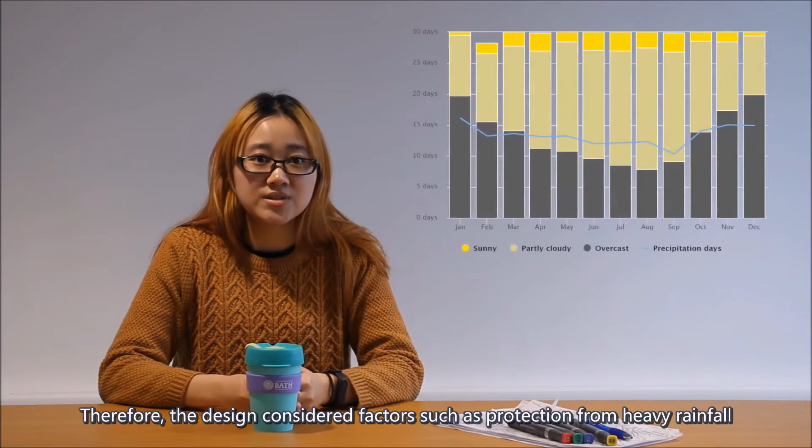The Creative College is in suburban Bristol, in the southwest of the UK, which has a temperate oceanic climate. It is warm during summer and cool and rainy during winter. Therefore, the design considered factors such as protection from heavy rainfall, as well as finding ways to provide the best daylight. The design began with the site analysis.

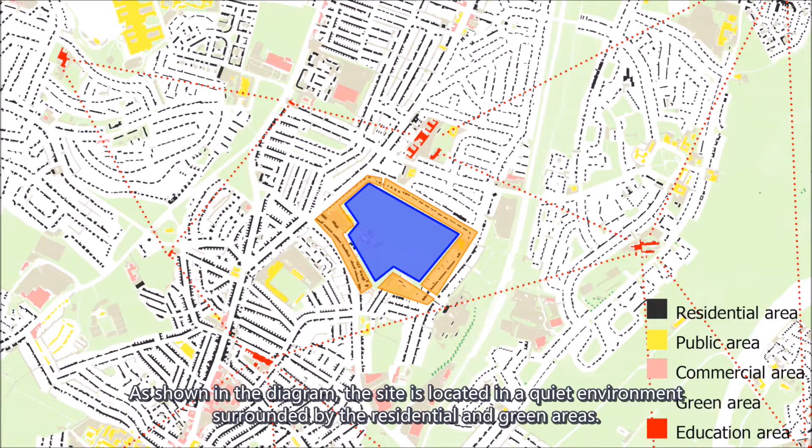As shown in the diagram, the site is located in a quiet environment, surrounded by residential and green areas. The site is mainly affected by the southwest wind. We decided to use windows at various levels to improve indoor air ventilation.

The topography of the site decreases from northwest to southeast. We designed large stairs to allow the students to sit and rest.

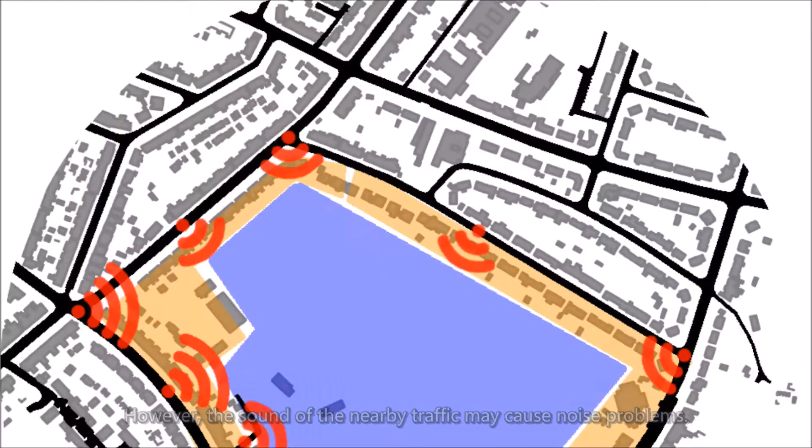The traffic is most convenient on the south side of the site, which leads to the city center. The location is suitable for including school gates and introducing bus stops. However, the sound of nearby traffic may cause noise problems. Therefore, the college was placed at the north part of the site. There are numerous trees on the site which were repositioned around the grounds to prevent noise and air pollution.

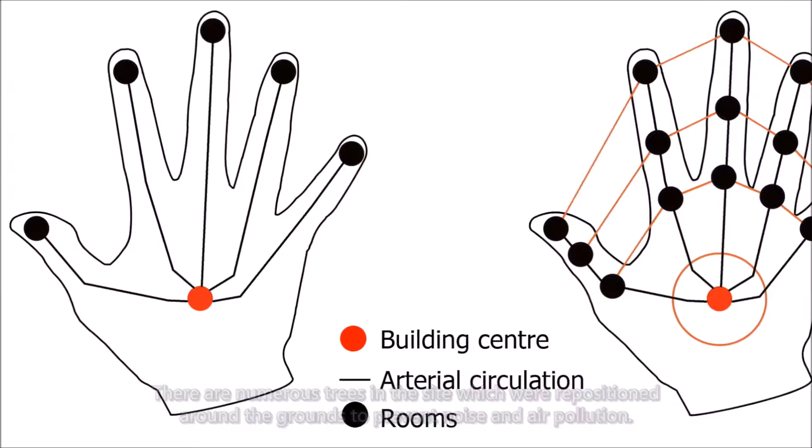The concept was based on the shape of a hand. The public rooms of the college were grouped together as a palm, and classrooms scattered like fingers. The college consists of a primary school, a secondary school, and a shared school.

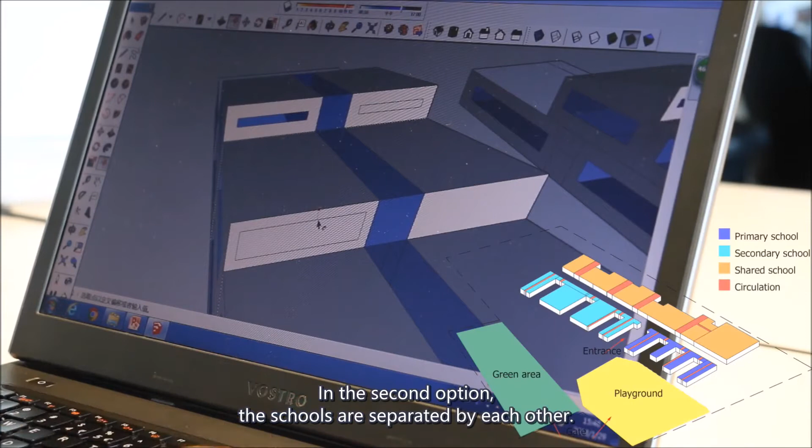There were three options. In the first option, these three schools are concentrated and connected by a long corridor. In the second option, the schools are separated from each other. In the third option, schools are dispersed but still connected by several corridors.

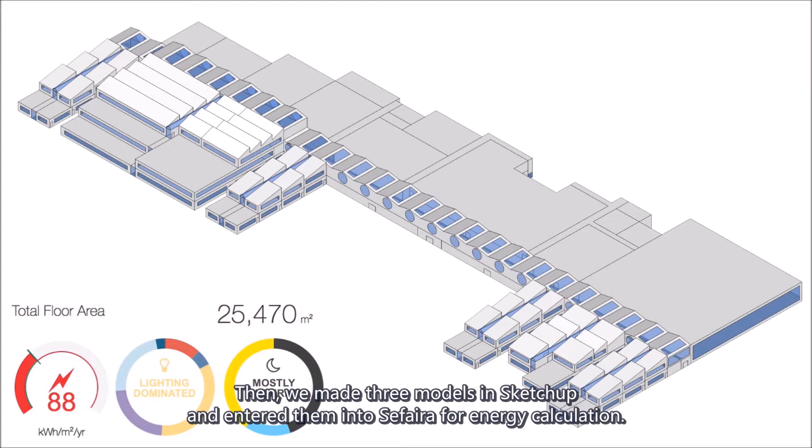Then we made the three models in SketchUp and entered them into Sefaira for energy calculation. These calculations revealed the third option to be the most energy efficient. Therefore, we adopted the third model for further design.

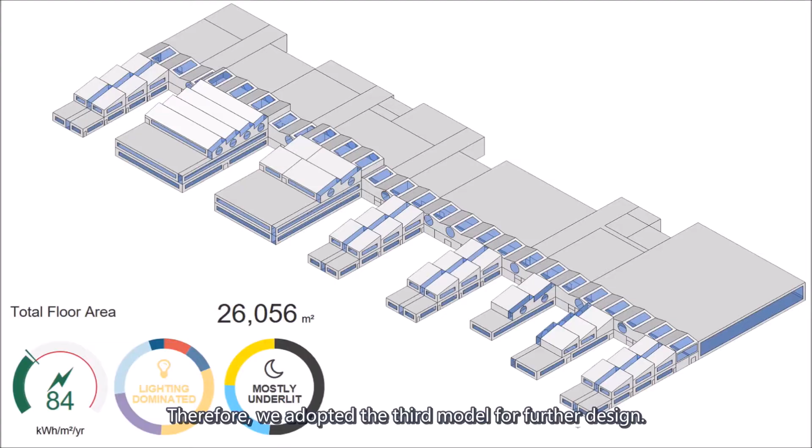The classrooms and offices which require high levels of daylight are organized in a stacked layout in the south. The toilets and changing rooms are in a private space in the middle. The shared school includes a sports hall, a dining hall, and centers at the north of the building.

In addition, the college has external terraces for students and teachers to rest. The college's large green area and trees support a healthy and comfortable learning environment.

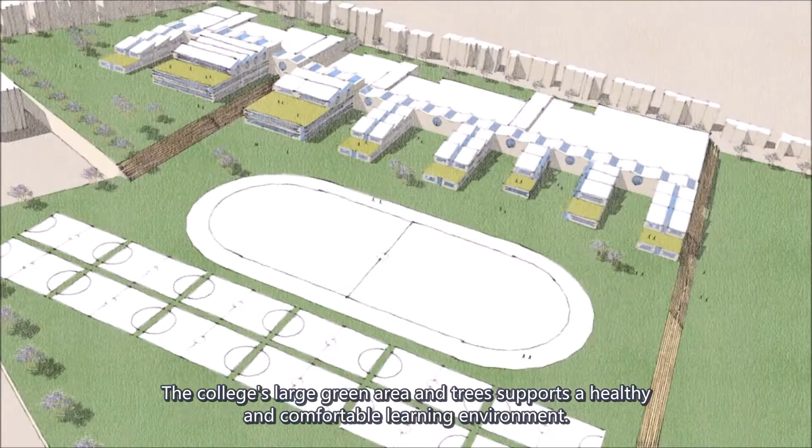Simulated by the Sefaira software, the average daylight factor was 2.84%. According to British standard, which stipulates the average daylight factor must exceed 2%, the performance is acceptable. In order to improve the daylight of the space, skylights and clerestory were designed. Because of their high position, they facilitate daylight in the building.

The college is located in Bristol, and according to the wind rose diagram, the wind direction can benefit the building's airflow. In order to reduce the environmental impact, a life cycle assessment was applied.

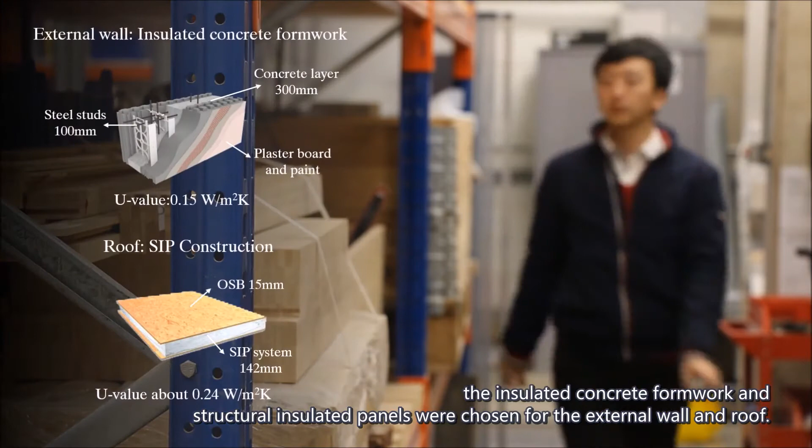By choosing materials from a professional rating system, the environmental impact of the building can be minimized. Manufacturing materials off-site is an effective way to reduce construction waste. Referring to the Green Guide from BRE, insulated concrete formwork and structural insulated panels were chosen for the external wall and roof. Regarding the acoustic performance of the classrooms, the internal walls were designed to include sound-resistant properties.

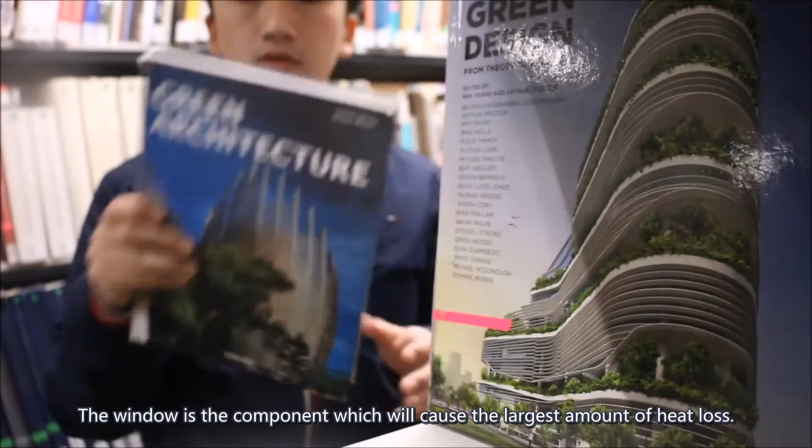The window is the component which will cause the largest amount of heat loss. Hence, low E glazing filled with argon was chosen to reduce the overall U value. The U value of the window was about 0.8 watt per square meter Kelvin. By choosing better construction materials, the envelope's energy performance will improve.

Before we got started with this project, we researched how energy systems in educational buildings work. In terms of renewable energy, we selected solar energy, biomass energy, and ground power, which can be acquired from recycled materials. The sun provides the greatest amount of solar energy to the Earth, therefore we want to make good use of it.

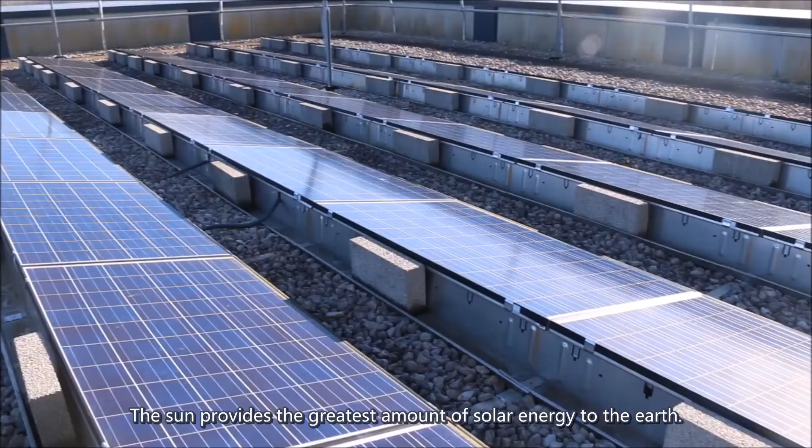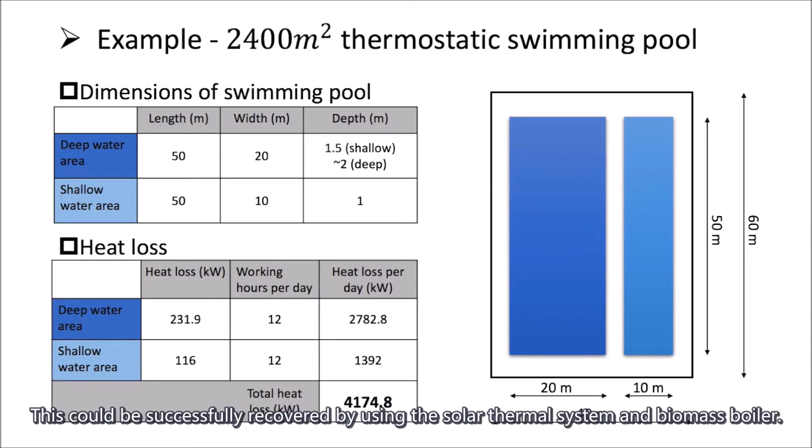We decided to install PV panels on the pitch roof. We also considered a solar thermal system for heat loss. Here is the theoretical result from heat loss calculation in the swimming pool. This could be successfully recovered by using the solar thermal system and biomass boiler.

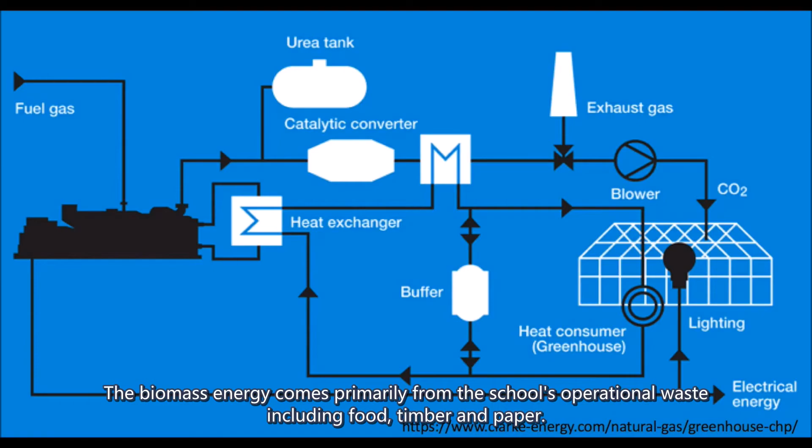We also considered a combined heating and power system to increase the efficiency of our building. The biomass energy comes primarily from the school's operational waste, including food, timber, and paper. It can also help students develop good habits regarding reusing waste.

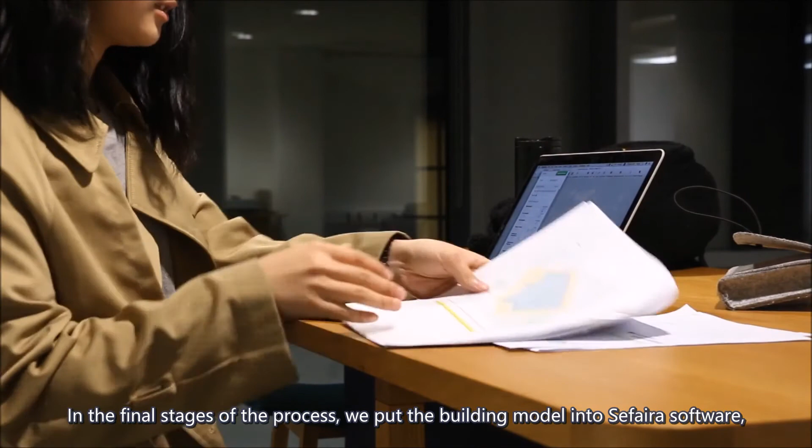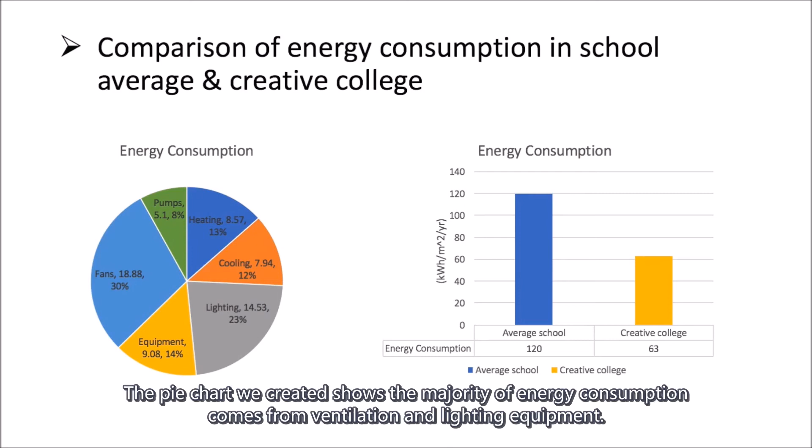In the final stages of the process, we put the building model into Sefaira software, which revealed an overall energy consumption of 63 kWh per square meter per year, nearly half of the energy consumption in traditional schools. The pie chart we created shows the majority of energy consumption comes from ventilation and lighting equipment.

To increase the sustainable level of our building, to meet the demand of passive house, modification of vents and daylight openings are important issues we must consider in future development.